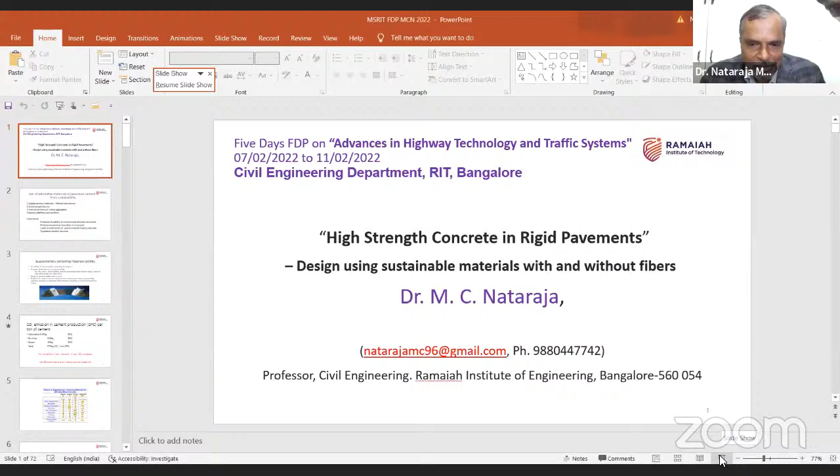Thank you, Professor Niranjan, for your nice words. Respected participants, mainly the teachers from different engineering colleges across the country, I'm extremely happy to be a part of this particular program, the 5-day FDP program being organized by the Department of Civil Engineering at Ramaiah Institute of Technology, Bangalore. As you know, the FDP is on advances in highway technology and traffic systems.

I'm extremely grateful to the first speaker. I was a bit worried whether I'd be able to give the complete glimpse of what I wanted to share as part of high strength concrete, especially applied to rigid pavements. But my job has become really simple because the previous speaker, the professor from IIT, covered many aspects of sustainable construction and sustainable materials, especially in concrete making as applied to pavements. I'm indeed grateful to the professor for making my job a bit easy.

Teachers, today I'll be introducing to you, for about 1 hour, the importance of high strength concrete, especially in the area of rigid pavements. How one can design high strength concrete using sustainable materials, with and without fibers, is what I'll be interested in covering.

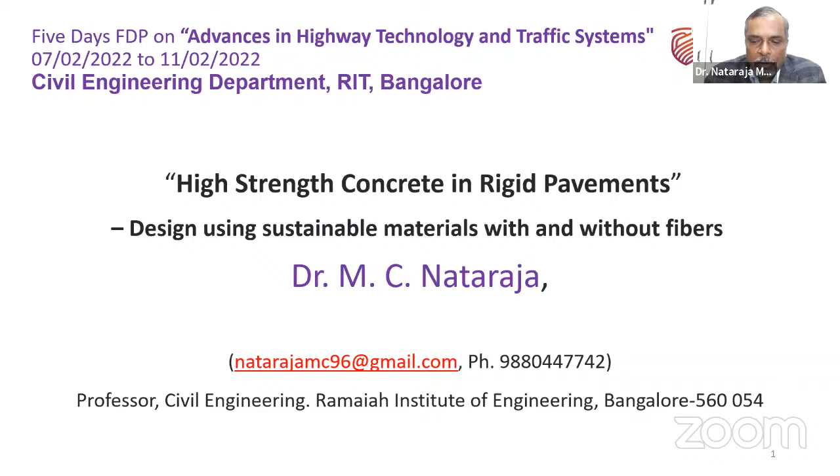And maybe at the end, for about 10 minutes, I'll be introducing the importance of fiber, especially in high strength concrete, mainly from the point of ductility and energy absorption capability of the concrete. I will now first show my slide.

Just to have a small introduction, use of alternative materials in pavement concrete, mainly from the sustainability point of view. Some of these materials were covered by the earlier speaker also in the first session. You're all aware of supplementary cementing materials.

Basically, they are called mineral admixtures. We have fly ash, slag, silica fume, metakaolin, calcined clay. And of course, we have a host of such mineral admixtures being covered in IRC code, and also in IS 456, being the basic code for concrete.

We also have a host of chemical admixtures, especially plasticizers, superplasticizers and hyperplasticizers, which are very popular, mainly from the point of enhancing the workability of the concrete, and from the point of saving cement or cementitious material. This chemical admixture is one of the compulsory things we see in today's RMC concrete.

Also, my dear friends, we have a lot of alternative aggregates, fine and coarse, that are being used in current concrete. You know that IS 383, published in 2016, speaks of many alternatives as part of fine and coarse aggregates, and use of these materials is really encouraging.

And of course, we also have special additives such as fibers. Different types of fibers are there, but I'll be rather interested in telling what happens to the concrete, especially high strength concrete, when steel fibers are introduced.

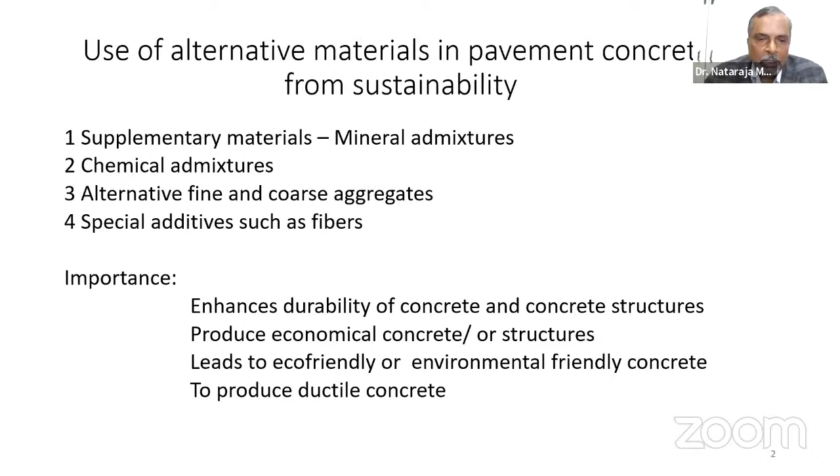So the importance of these supplementary materials, to put it in 2-3 sentences: these materials enhance the durability of the concrete, and when that concrete is used in structure, the performance of the concrete structure also gets enhanced. It produces economical concrete and hence economical concrete structures as well. It leads to eco-friendly concrete, and to produce ductile concrete, obviously with the help of steel fibers.

Now, these are all the host of supplementary cementing materials - I have taken this figure from Google - and we will be seeing different types of materials as an alternative to cement, and as a substitution to part of the cement. These days, people are using these materials.

In fact, I already made a mention of fly ash, slag, ground granulated blast furnace slag, calcined clay, metakaolin, and of course silica fume. Metakaolin and silica fume are the new generation supplementary materials.

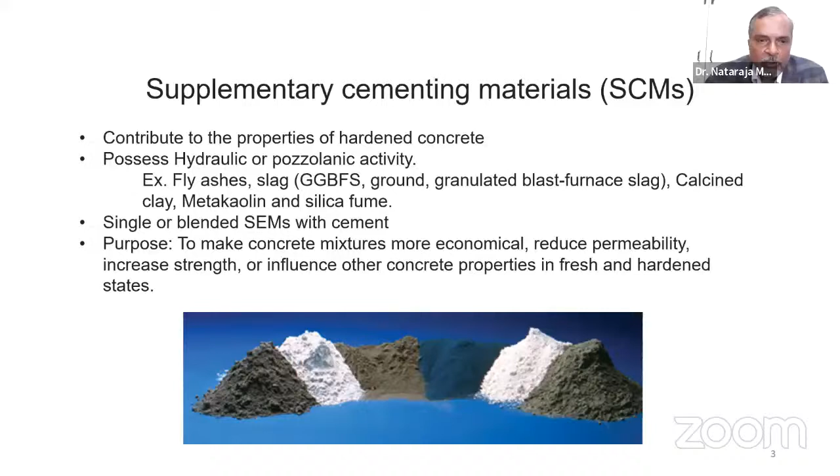We need to use it to the extent of about 10 to 15% in the production of high strength concrete. Otherwise, getting strength beyond, say, M60, M70, going up to M100 plus is extremely difficult with the use of other supplementary materials. So silica fume or metakaolin is a must supplementary cementing material as applied to high strength concretes.

Now let's see the importance of ordinary Portland cement in concrete production, which you are probably all aware of. Use of OPC today is not really recommended.

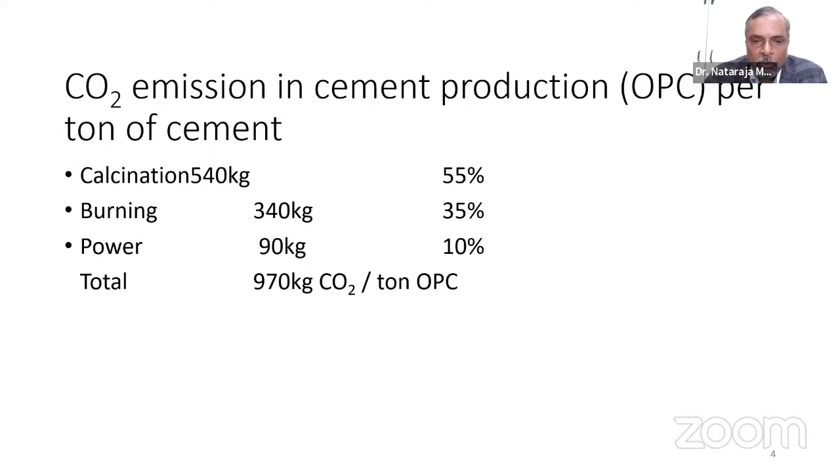As you know, production of 1 ton of cement leads to almost 1 ton of carbon dioxide emissions. We have different processes in manufacturing cement. The calcination process releases about 540 kg of carbon dioxide, constituting about 55%. Burning also produces carbon dioxide to the extent of about 35%, around 340 kg. We also need power for the energy part of cement production, about 10%, or 90 kg. All put together, this is close to 970 kg, which can be rounded off to approximately 1000 kg. So producing 1 ton of cement releases almost 1 ton of carbon dioxide to the atmosphere, which is something very large.

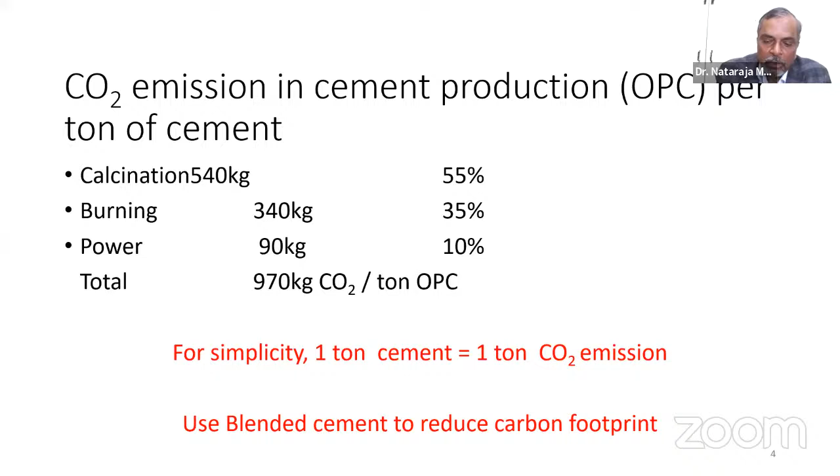This definitely has too much of a carbon footprint that needs to be reduced. The only way to reduce this is through use of different types of supplementary cementing materials and their combinations - binary blends, ternary blends, and you can also have blends of 3, 4, or 5 such supplementary materials, which is quite possible.

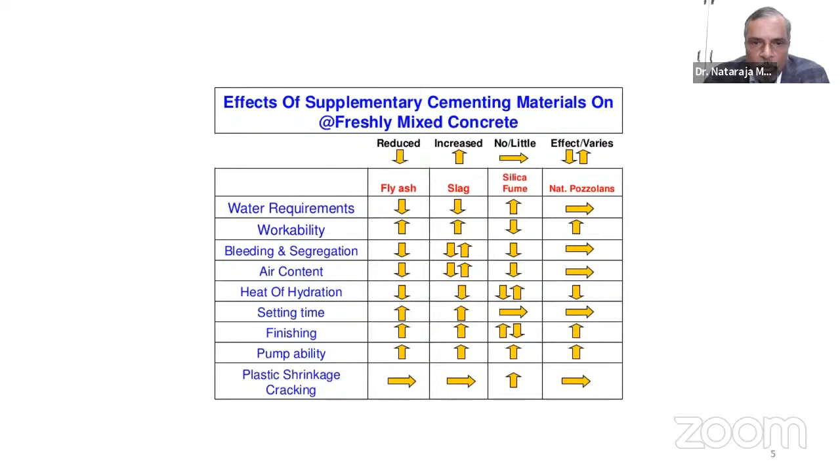In this slide, I have taken information showing that whatever property of the concrete you are talking of, especially from the point of fresh concrete - water requirement, workability, bleeding, segregation, heat of hydration - many of these properties are becoming better. So many requirements of concrete today are getting improved mainly because of the use of these supplementary materials.

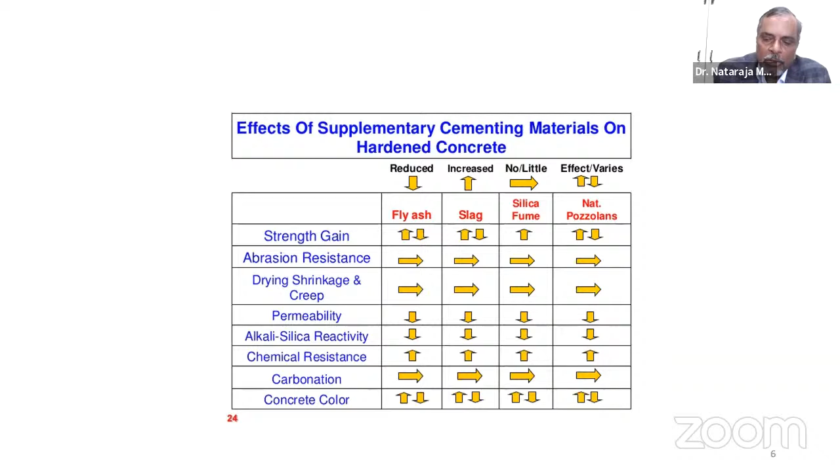The chemical resistance definitely improves. As far as carbonation is concerned, some people say it might improve when you have a combination of supplementary materials, but otherwise it's not much of a problem - it doesn't have much significance, that's why the arrow is almost horizontal. These are some of the advantages due to use of supplementary materials in production of any type of concrete from the point of hardened properties.

The next important thing is the use of chemical admixtures. According to the American Society for Testing and Materials code of practice, different types of chemical admixtures are permitted: type A being water reducing admixture, type B retarding admixture, type C accelerating admixture, type D water reducing and retarding admixture, type E water reducing and accelerating admixture.

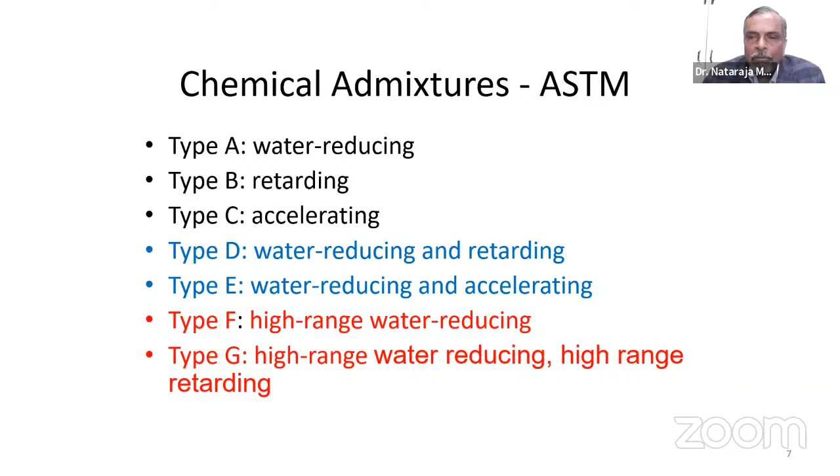In the current work we have done, in one way or another, we are using type F and type G, where type F is high range water reducing admixture - these are referred to as super plasticizers or hyperplasticizers in our country. We also have high range water reducing admixtures, very close to hyperplasticizer, maybe with accelerating or retarding effect depending on the situation. Whatever codes of practice we have in our country, similar codes of practice exist even in the West.

If you want to look at some Indian codes of practice, it is IS 9103. I have given the code of practice for ASTM which I already spoke of. We also have the British code of practice BS 5075 and IS 9103.

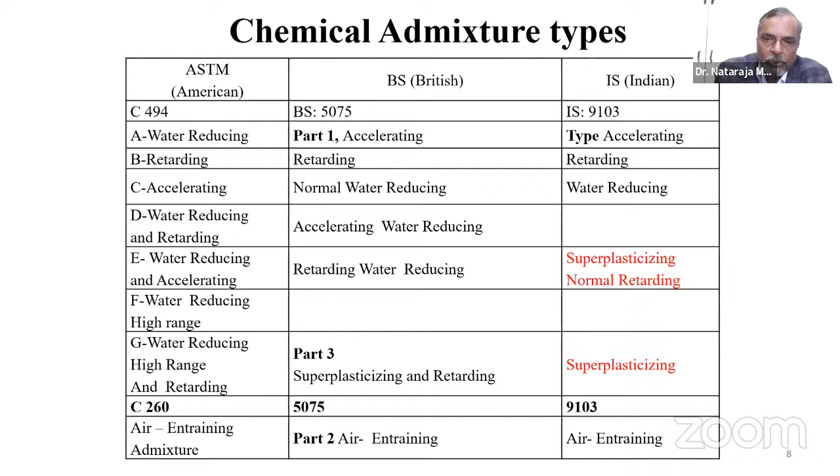Whatever the list of chemical admixtures covered by ASTM, a similar type of coverage is there in BS and also in IS. What is important for Indian research is that we have different types of plasticizers available. It could be a conventional plasticizer, a super plasticizing admixture of normal retarding type, a conventional super plasticizer, or a hyperplasticizer. Use of these super plasticizers and hyperplasticizers is very popular in RMC, especially in the production of high strength and high performance concrete.

So now I'll be interested in introducing the toughness of concrete. This is one of the properties we're talking of today, especially for pavement applications. If you see conventional concrete where fibers are not used, whether normal strength or high strength, though it is very good from the point of compressive strength, it has its own limitations. Especially the ductility part of the concrete is rather questionable.

The energy absorption capacity of the concrete is rather less under all types of loading, whether compression load, tension load, especially in split tension test or flexural test, or as applied to wear and tear resistance. The normal concrete is not going to perform well because it is highly brittle in nature. Many people are under the impression that as the strength of concrete increases, many toughness related properties will increase. There might be a small improvement in toughness, but the rate of increase in toughness and energy absorption capacity is not in the same ratio as the compressive strength increase.

So when you take M40 concrete compared with M20 concrete, the toughness may be slightly better, but not that the toughness of M40 concrete is increasing almost by 100%. Unless we add some additional materials to the concrete, it is extremely difficult to increase the energy absorption capacity of the concrete. So this is where the use of fibers plays a very important role.

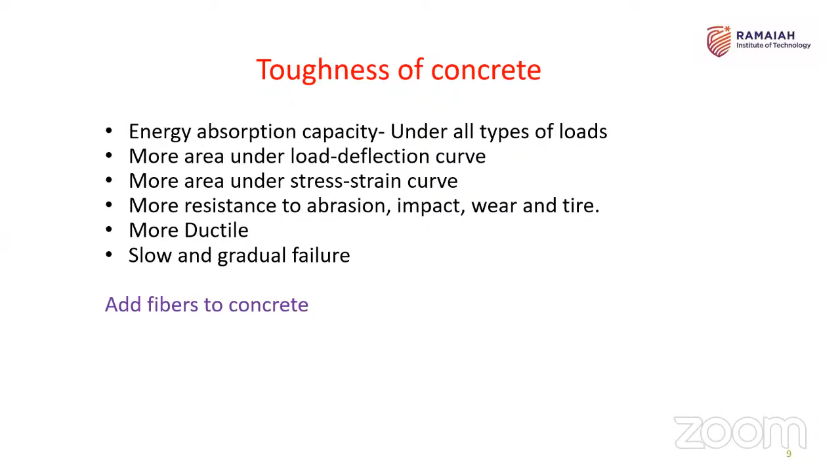More area under the stress strain curve - the moment I say stress strain curve, obviously it is the stress strain characteristics of the concrete in axial compression. So that is where the improvement in toughness, improvement in energy absorption capability of the concrete, and more resistance to abrasion, impact, wear and tear is mainly because of the addition of different types of fiber. But if you add steel fiber, there is a lot of improvement in these properties, mainly from the point of strength and energy absorption capability. And that is where structurally your concrete becomes better and better with the addition of steel fiber.

So what I want to tell you is that with this addition of fiber, your concrete will become more ductile. Obviously the failure of the concrete will be rather slow and gradual - it is not an instantaneous type of failure, not a catastrophic type of failure. So you should be very happy to have these steel fibers introduced into the concrete. Add fibers to concrete so that many of the performance characteristics of your pavement increase.

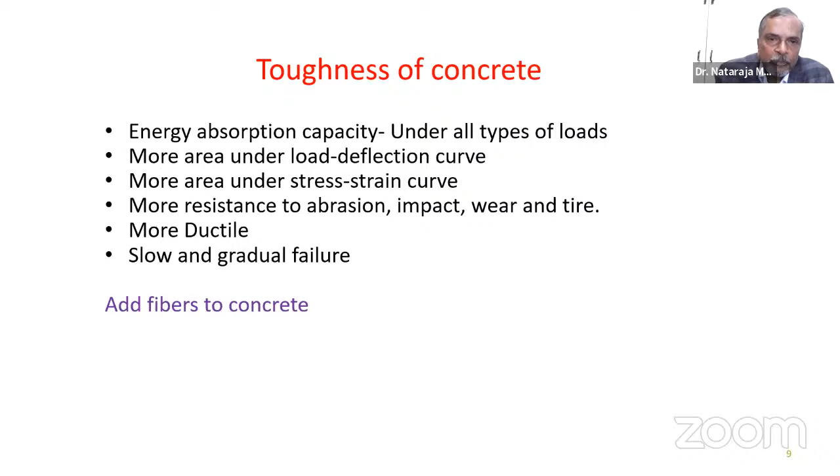That is where the compressive strength of concrete is really important from the point of characterization of concrete with respect to its grade. But without knowing the real distribution, the real area under the curve, the load deflection diagram, or even the stress strain diagram of the concrete, it is really not possible to define any performance characteristics.

Now to this plain concrete, if you add fibers at some rate, I will come to that in a short while, the area of the descending part also gets modified, which we will be discussing later, and the load carrying capacity also will increase marginally.

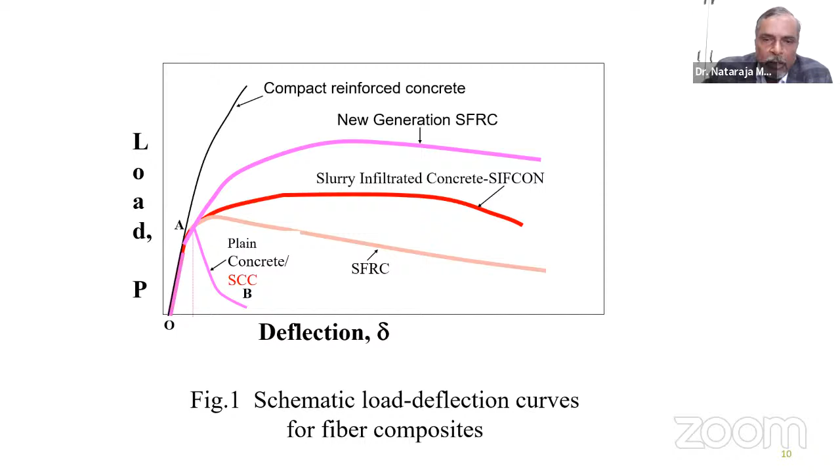Now just a few words connected with fiber, because today fibers are also being used. IS 10262, published just a year back, is a bit silent about the use of fiber. But if you see the IRC code meant for concrete mix design, steel fibers are permitted. In fact we have already published several papers available in the Indian Concrete Institute journal - just a couple of months back one paper has come there. And there are several papers in this direction on the international platform, so you can refer and get to know the advantages of some of these fibers.

Aspect ratio of the fiber comes into picture, that is L by D - what is the length of the fiber, equivalent length divided by equivalent diameter. As the aspect ratio increases, the mechanical properties of the concrete might increase, but other related properties, especially from the rheological point of view - the workability and other things - might decrease to some extent. And how much fiber you're adding is another question you need to ask.

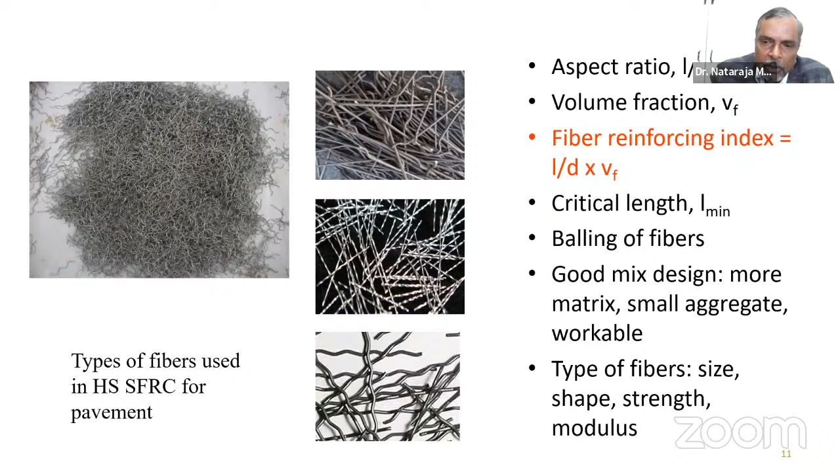So this is just a small introduction, because today these types of fibers are also being used in pavement concrete. And one more important point from the advanced concrete technology point of view, because today many of you must have studied this.

Concrete technology is a basic subject, and advanced concrete technology of new generation materials is what many people are talking of now.

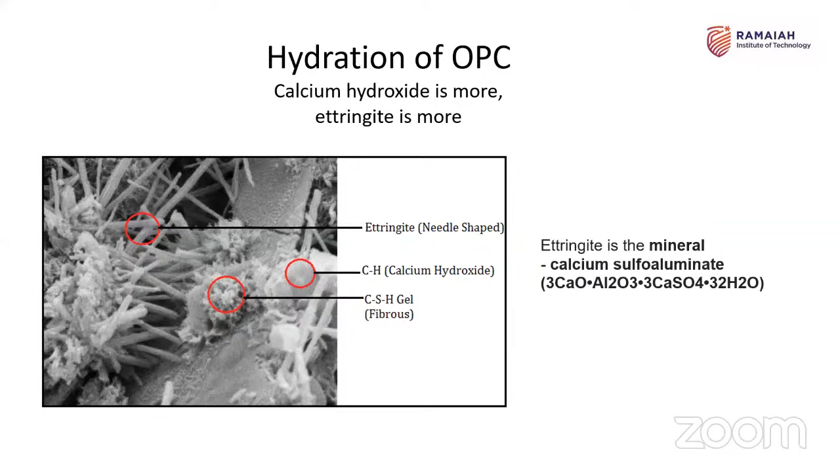When the OPC hydrates, we also should know that calcium hydroxide is liberated. This calcium hydroxide is not a good material. It reacts with carbon dioxide, and further reacting with carbon dioxide.

You get calcium carbonate and calcium bicarbonate, which leach out of the concrete. Because of this, the concrete becomes more porous inside. So that is where the durability of the concrete over time becomes questionable.

So we need to decrease this calcium hydroxide, but as long as you have OPC alone to the extent of 100% in your concrete, it is extremely difficult to avoid this calcium hydroxide. So this is really not a material required from the point of durability.

Also, we have one more important compound, the calcium aluminate. Though we keep the calcium aluminate less than about 10%, this calcium aluminate, along with some sulfate compounds, matters because many a times the concrete will be exposed to the marine environment.

And in fact, we have acid attack coming into picture, and sulfate attack coming into picture, with different types of sulfates reacting with gypsum.

And with calcium aluminate, over time, we get a material called ettringite. This is a sort of mineral, and it is one material responsible for the lack of performance, the lack of durability related performance, especially in your concrete.

This is referred to as calcium sulfoaluminate, which is really a detrimental material as far as ordinary Portland cement is concerned: ettringite. And of course, ettringite can form immediately, or it can even form over time, depending on the situation.

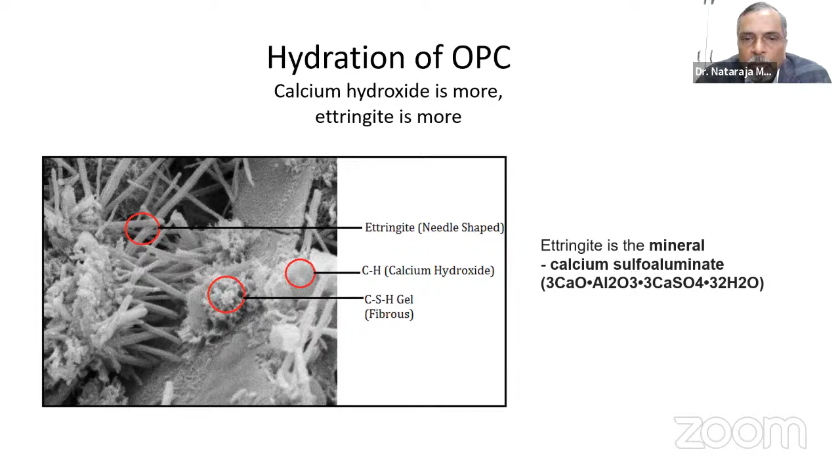We also have high volume fly ash concrete, very popular in the West, but as far as our country is concerned, maybe to the extent of about 25 to 30% is being used in blended cement. And of course we have some RMC applications where slightly in excess of 30%, maybe going up to 40, 45%, but still definitely not more than about 50% of fly ash in any of the concrete applications.

One more important thing I would like to tell you, especially from the point of view of high strength concrete mix design: I have seen people simply modifying the composition of the concrete, the combinations of the supplementary material, without understanding how these supplementary materials are really contributing to the enhanced strength of the concrete. You will be able to make this out only when you see the scan picture of the concrete.

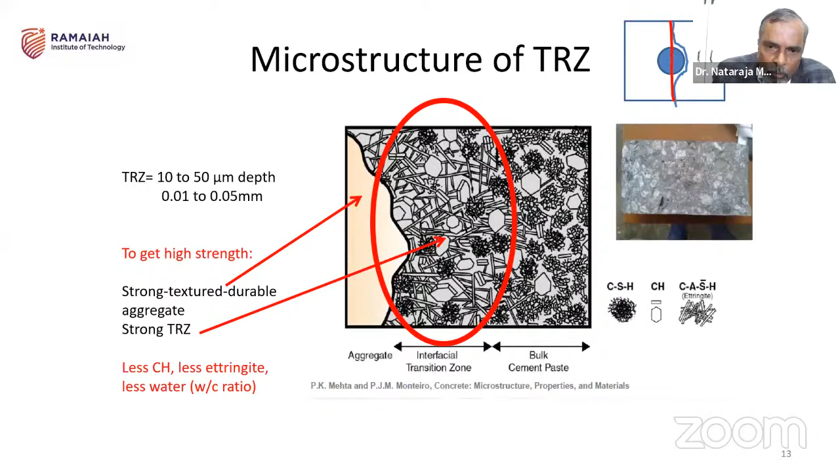So you can call these two materials as having a Young's modulus, exhibiting linear elastic properties. But concrete is elastic, my dear friends, it is not linearly elastic. There's no Young's modulus you can define for concrete.

We have different definitions of modulus as far as concrete is concerned. When you add the aggregate and the cement paste, we get concrete, and the performance of the concrete lies in between that of the aggregate and the cement paste. This is very clear.

You will never be able to bring the quality below that of the paste unless the mix design is very poor. At the same time, whatever way you do the concrete mix design, you will never be able to bring the behavior of the concrete much closer to the aggregate, because of the very poor quality of the cement paste.

How to increase the quality of the cement paste is the question now. That is where a low water cement ratio of 0.2, 0.25, 0.3 with supplementary cementing materials comes in. Probably this line itself I can push towards the y-axis.

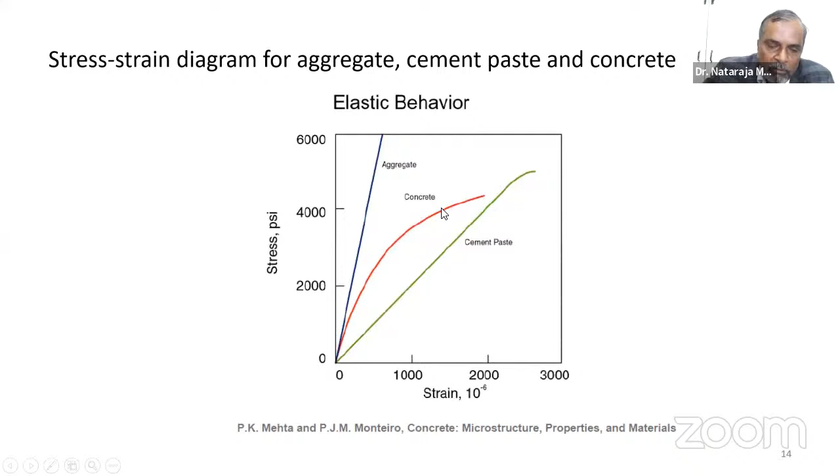At the same time, if you go for a good quality coarse aggregate, today a lot of unconventional materials are coming up, like steel slag, which is far better compared to conventional aggregate. I'm very sure this behavior can be pushed further towards the y-axis, and the cement paste behavior can also be pushed further, so the concrete behavior becomes far better, as you'll see in the next slide.

With this, any property of the concrete - the modulus of elasticity, the secant modulus, the chord modulus, whatever you're talking of - will definitely be better compared to conventional concrete. So keeping this concept in mind, if you do the concrete mix design, getting M60, M70, and even M100 plus concrete with materials available in the Indian context is really possible.

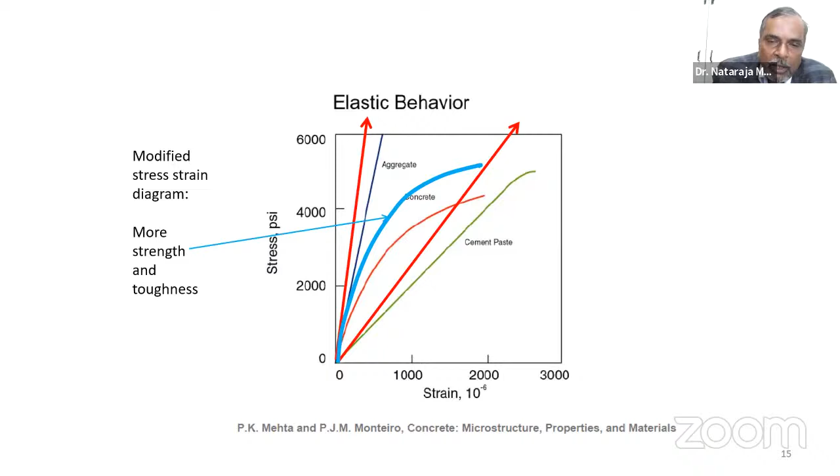That's what I wanted to share as part of high strength and very high strength concretes in our country. Also, one small thing I'd like to tell you - this is where some debate of water cement ratio comes into picture. I'm not going to take much time here.

The water cement ratio in excess of 0.55 is really not permitted by the Indian code, IS 456-2000, being the mother code of India. Why is it so, and why can't we go for a concrete of 0.6 or 0.7? But in Western countries, higher water cement ratio is permitted.

What is important is that the concrete is impervious to water, impervious to chloride ion, impervious to all sorts of ingression. But as far as water is concerned, when it evaporates, certain internal defects in the form of capillaries or voids will be introduced into the concrete, and that is the problem.

But when you start using supplementary cementing materials along with the cement, even with 0.55, 0.6 and 0.7 water cement ratio, my dear friends, if you see these strength ranges of 2000 to 3000 PSI - this graph is taken from the American Concrete Institute 211 code, available on the internet - kindly see that 3000 to 5000 PSI is nothing but concrete having a strength of 20 to 35 Newton per mm square.

But why, in the Indian context, are our people struggling to get even M20, M25? They are simply putting water, and with that water, they are not able to get the compressive strength because they are not putting supplementary cementing materials. They want to produce the concrete only with OPC, and that is the reason.

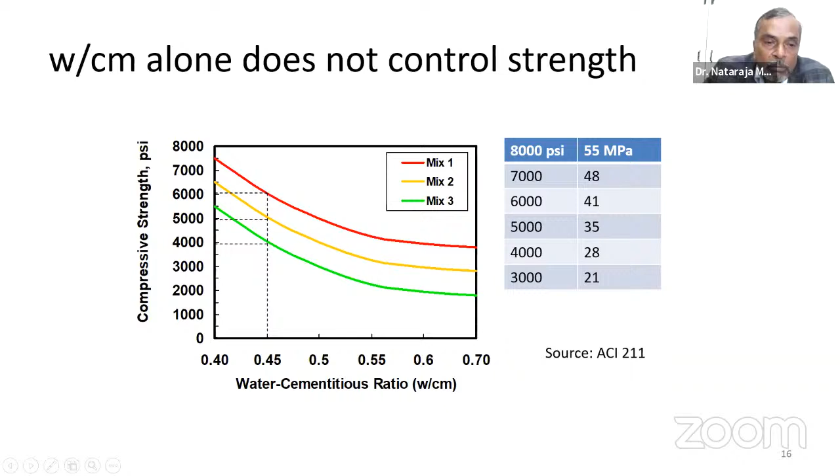If you see in the next slide, the moment you start using supplementary cementing materials, some combination of SCM1 where I have tried with fly ash, and maybe the second one with slag, some combination of fly ash and slag as a ternary blend, kindly see the amount of charge that is passed when conducting a rapid chloride permeability test.

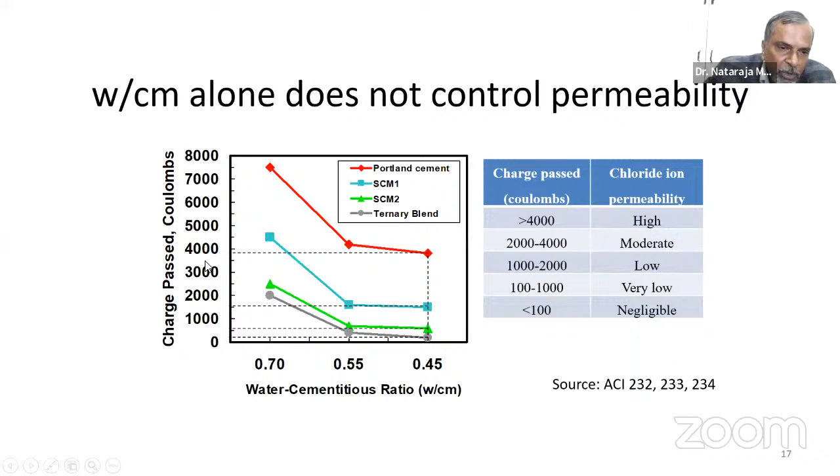This particular service is available everywhere, and every laboratory is having this facility. Even at a water cement ratio of 0.7, not permitted by the Indian code, you are able to get a concrete whose charge passed, the Coulomb value which defines the impermeability of the concrete, is close to 2000. If you see the rating given by the ASTM, it is a very, very low rate of charge being passed. But otherwise, if you go only for ordinary Portland cement, even at a water cement ratio of 0.7, your charge will be very close to 7,000 to 8,000, meaning it is a highly permeable concrete.

So if you want to make your concrete less permeable, you have a mix design, everything is being defined, but replace some 25% of the cement, 50% of the cement, with quality supplementary materials, bring down to binary blend, ternary blend, and with that your rapid chloride permeability decreases tremendously, giving a very low permeability concrete.

In many studies conducted in the recent past, our RCPT value is very close to 100 to 200, indicating that our concrete is almost close to some sort of polymeric concrete, epoxy concrete, highly impermeable concrete, and that can be regarded as a metal concrete. Today people are talking of metal concrete, where my concrete can be compared similar to that of a metal from the point of permeability.

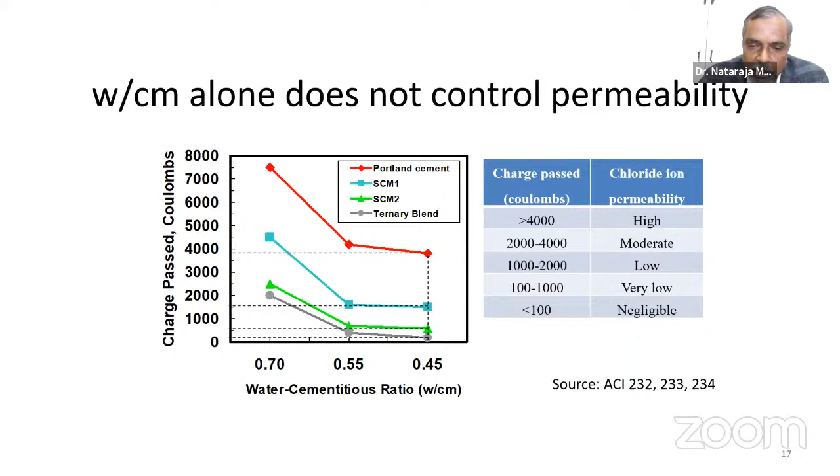Now these are all some of the important things you should know before you venture into designing high strength concrete or even high performance concrete, especially M60 going up to M100. At present the Indian recipe is available, and anything beyond M100 is also quite possible.

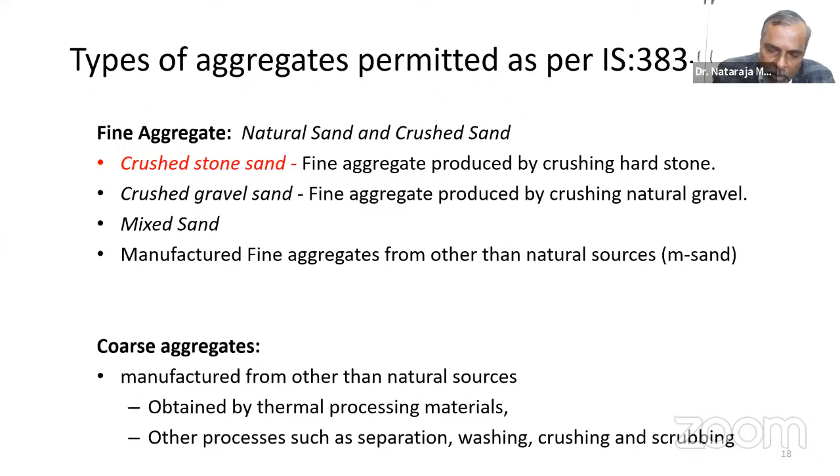And of course you also have a very interesting code released by the Bureau of Indian Standard, IS 383. 1970 was the earlier code, where only natural river sand was permitted. But today we have a host of such aggregates that can be used as fine aggregate and also as coarse aggregate. I'll be just showing you one slide, which is really not encouraging.

If you ask me as a concrete technologist, I really don't agree with what Bureau of Indian Standard has suggested at present. Indian Standard is suggesting just 20 to 50% replacement of regular aggregate with unconventional aggregate, that too in plain concrete. So that is where these values are not so encouraging. But if you see, in case of RCC, not even to the extent of 25% the Bureau of Indian Standard is recommending. So now it is high time for BIS also to come out with some new documents based on the research information available in the Indian context, and also taking some international references.

100% of these types of unconventional materials should be recommended. If you see many of the technical papers which we have published over a time of 10-15 years in the past, they are all with 100% replacement of the aggregates. Of course we also used some 20, 40, 60% just to tell you where exactly certain parameters will become optimum. But otherwise, even if you use 100% of the aggregate, you may be having a problem of workability.

Increase the workability with the admixture. You may be having a problem of compressive strength. Decrease the water cement ratio, decrease the water, and ensure that a slightly higher percentage of the chemical admixture is exercised. With that your workability is satisfied. Your lower water cement ratio, definitely according to Abrams' law, your compressive strength increases only with mineral and chemical admixture.

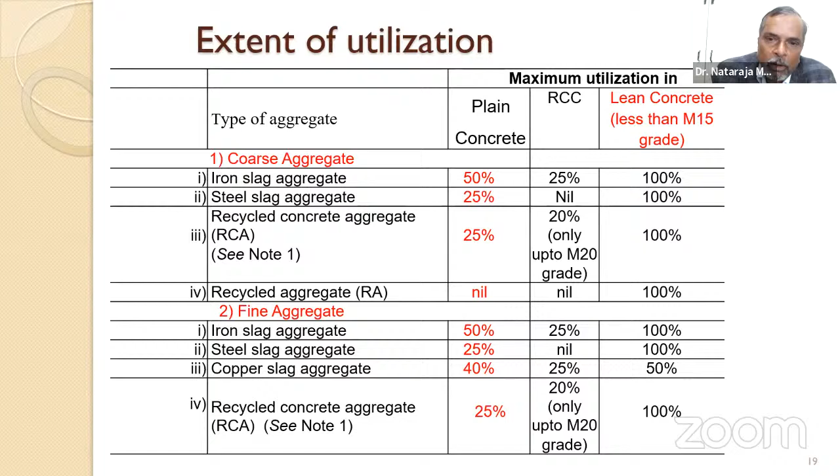Now, finally coming to the mix design, the studies on high-strength concrete, IS 10262 2019. My dear friends, I'm not going into the greater details of concrete mix design, because you are teaching this particular course to your undergraduate students also. So I will just tell you in a nutshell how one can design the concrete, taking all the information discussed so far, so that some good information can be looked at from the mix design point of view. We have taken up a very simple work.

I'm just taking one combination of supplementary materials. I have used GGBFS to the extent of 50%. Silica fume - without silica fume, it is not possible to produce high strength concrete. Otherwise, you may have to use metakaolin to the extent of about 10 to 15%. So 65% of supplementary materials and only 35% cement we have considered here to produce concrete up to M100.

And also we have the PCE based admixture, polycarboxylic ether based admixtures. It is a new generation admixture, works on the principle of steric hindrance, not on the principle of electrostatic repulsion. Electrostatic repulsion is a concept generally observed in plasticizers.

Today we have high molecular weight based polycarboxylic ethers and esters with the steric hindrance concept, wherein about 0.25% of admixture - maybe to make things clear, just half a liter of chemical admixture - where you will be able to remove about 30 to 50 liter of water. Instead of making concrete with 190 to 200 liter of water, you need only 130 to 150 liter of water, my dear friends.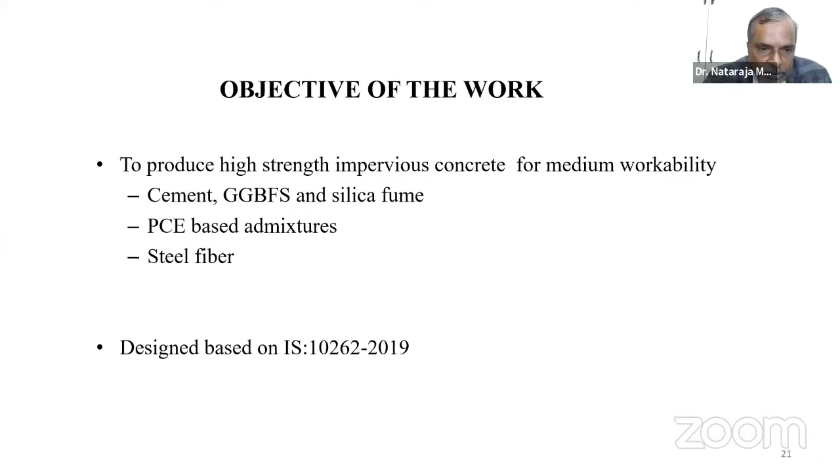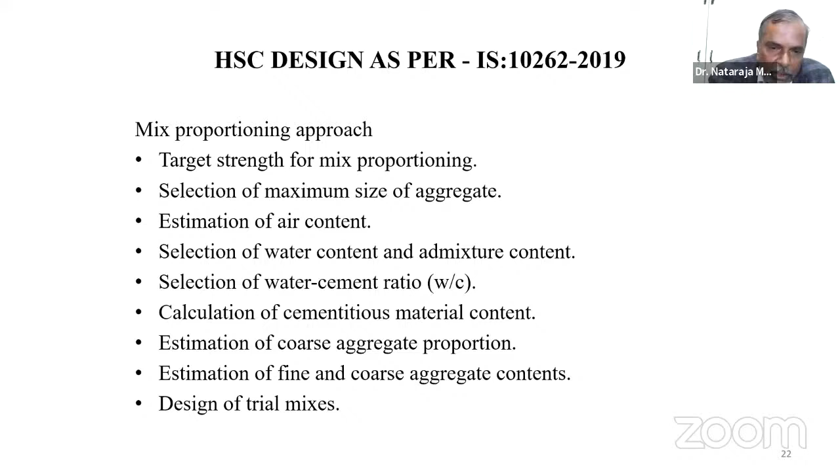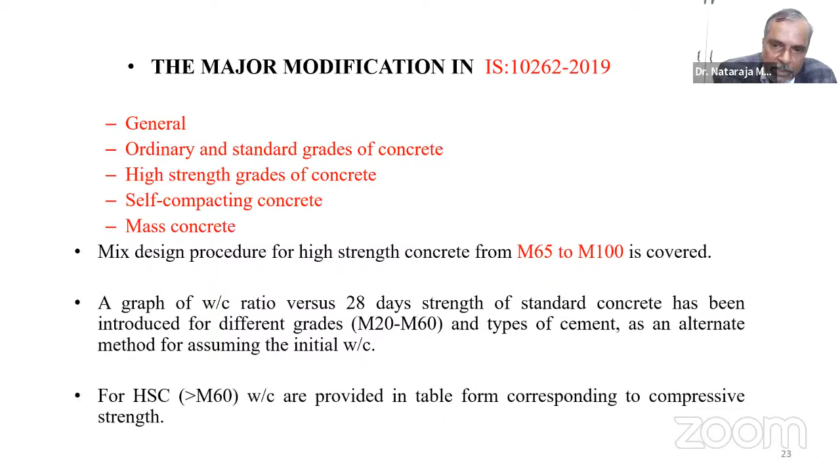And of course we also tried with steel fiber as another work, where some ductility part of the concrete can also be appreciated. So there are 9 steps in the mix design, which is already known to the faculty. Since you're all faculty, I'm not going into the details as to what this mix design is all about. And of course, M65 to M100 is what the concrete mix design covers. High strength concrete means 65 and above only, as far as the current code is concerned.

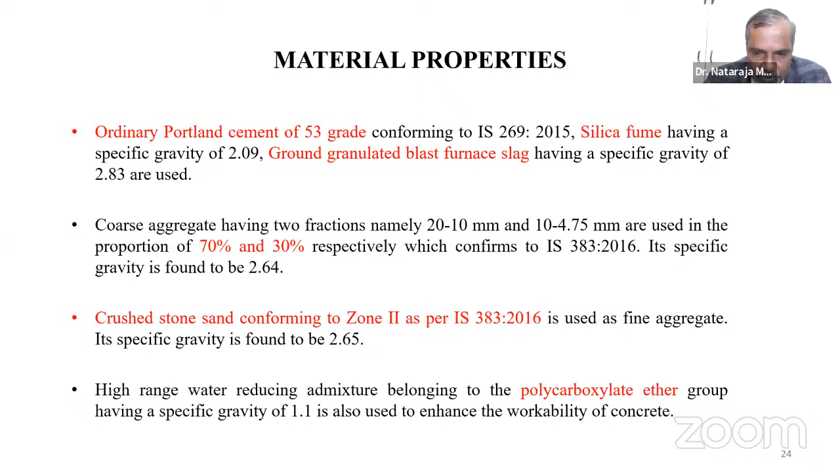And we have used IS 269/2015, again the latest code, where 53 grade cement is permitted, silica fume with a specific gravity of 2.09, and GGBFS with a specific gravity of 2.83, and 70% of the bigger aggregate, 20 to 10 size, and 30% of the lower size, 10 to 4.75. Sand is zone 2, recommended for strength concrete, and as I mentioned, polycarboxylate ether being the hyperplasticizer.

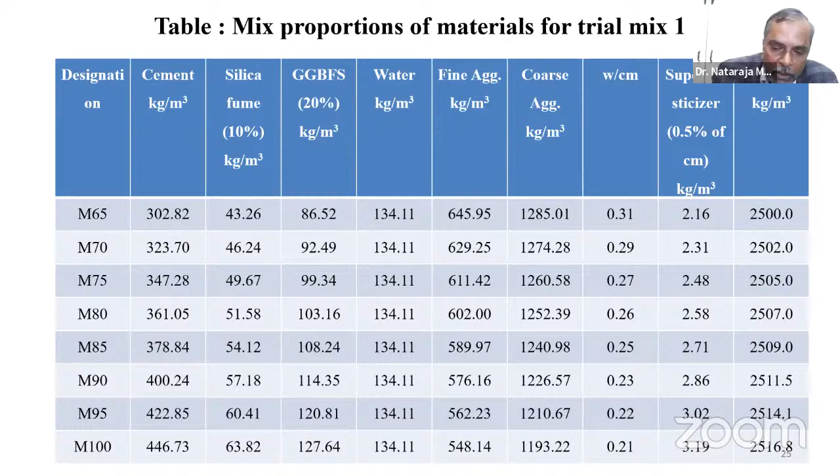The same thing I have put in a pictorial way, so you can just appreciate it. I'm leaving the PPT also for your reference, maybe you can just go through it whenever you have free time. And you can get back to me on phone, or send mails to me so that I'll be responding to your queries.

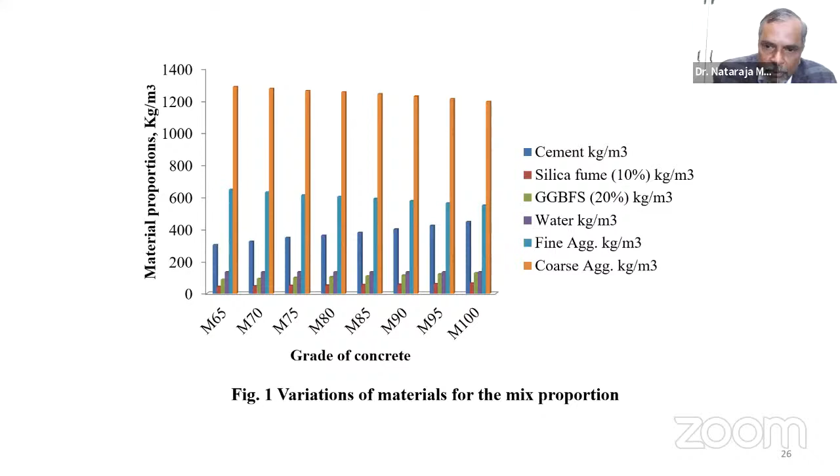And of course, we need to do the trial mixes. Without trial mixes, your mix design is not going to be completed. In fact, I have seen in many engineering colleges they do only one mix design and finally recommend it, but we need to go for a trial mix. What is trial mix? Keeping the water constant and changing the water cement ratio by plus or minus 10%, we need to work out two additional concrete mixes for any concrete mix design, so that economic constraints can be exercised in your concrete mix design.

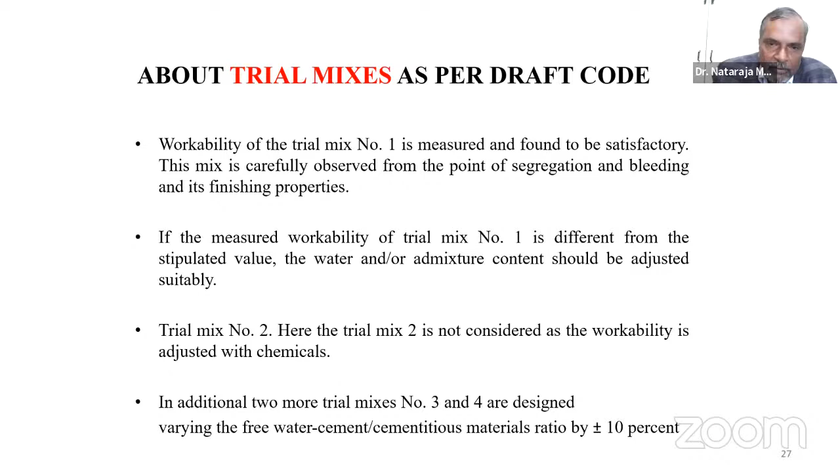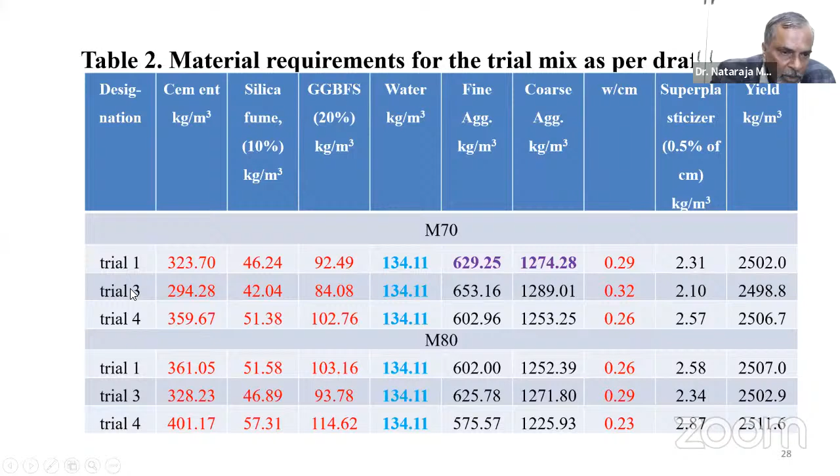Now kindly see here, I have put some information. If you are designing an M70 concrete, this is the first trial mix, what you get from the first trial. And anyway, you have the computer program where additional trial mixes can be exercised. Based on the result of the first trial, we will be doing the mix design of trial 3 and 4. This has to happen inside the concrete laboratory.

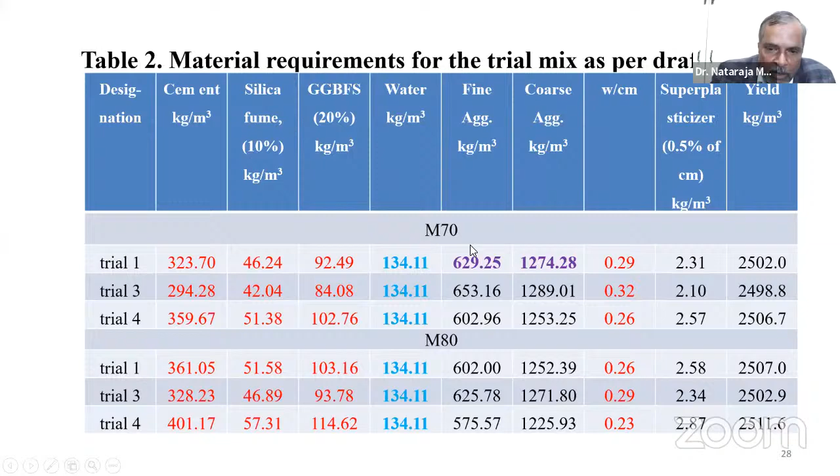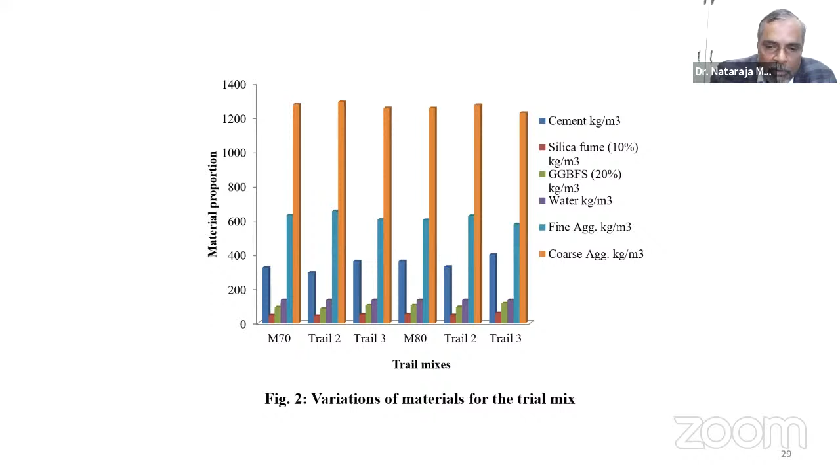And of course, kindly see the water cement ratio. In the first case it is 0.29 plus or minus 10%. And for M80, the first water cement ratio is 0.26, what I get from the basic mix design, and with plus or minus 10% I will be having two water cement ratios. Kindly see the increase and decrease in the cementitious system. And all these things we need to again observe in the form of a graph, and also develop what is called the water cement ratio graphs to appreciate what variations are likely to come.

And kindly see, we have designed for 70. 75 mm was the target slump, but we are really not bothered what the slump of concrete is. Even if it is 50, we are not going to bother, because we slightly increase the admixture dosage and get the 75. By chance, if it is 100 mm as against 75, we need to decrease the dosage of the admixture so that any target value of workability can be achieved. This is not a design parameter as far as our work is concerned. So any change, I can adjust by changing the dosage of the admixture.

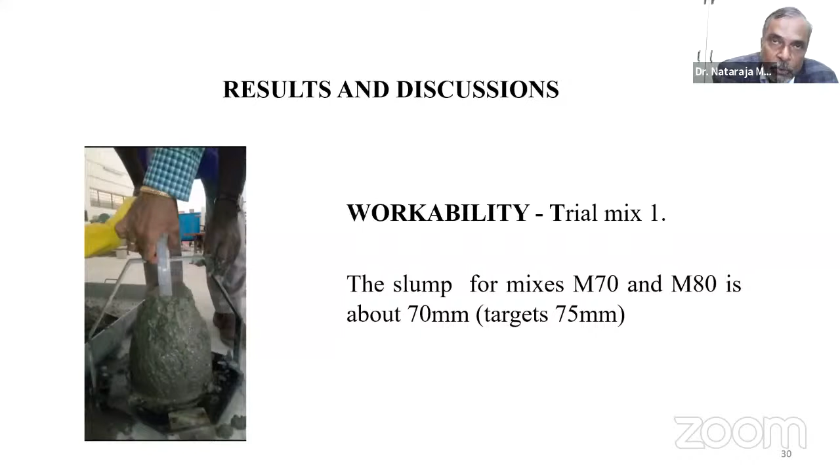And kindly see the compressive strength, it is quite appreciable at 3 days, 7 days, and 28 days. I have put it here: 59, 68, 79, and 90, as far as M70 concrete is concerned. At 28 days I'm getting 79. What I'm expecting to get is just 70 plus t times S, standard deviation times the statistical value, that extra component to take the difference from lab to field. That is where about 6 MPa extra I'm expecting, so 76 probably I would have been happy, but it is slightly more, I'm getting about 79, rather close to what I wanted. So I'm not doing any further change.

As far as M80 concrete is concerned, I need about 86, so I'm getting about 88. And kindly see, at 90 days there is a marginal increase in strength. One more important thing, especially for the teachers, I'm sure you are aware of this fact: the strength you get at 7 days, in comparison with the grade, is almost about 90% of the expected strength achieved at 7 days itself. So this is the beauty of high strength concrete.

Now, if you take conventional concrete, say 30 Newton per mm square, we get about 20 Newton per mm square at 7 days, that's 2/3 of the strength, meaning the remaining 33% comes from 7 days going up to 28 days. But in high strength concrete, you get almost 85 to 90% of the strength, almost equal to the grade. I want M70, I'm getting much more than the grade. I want M80, I'm getting much more than the grade at 28 days itself.

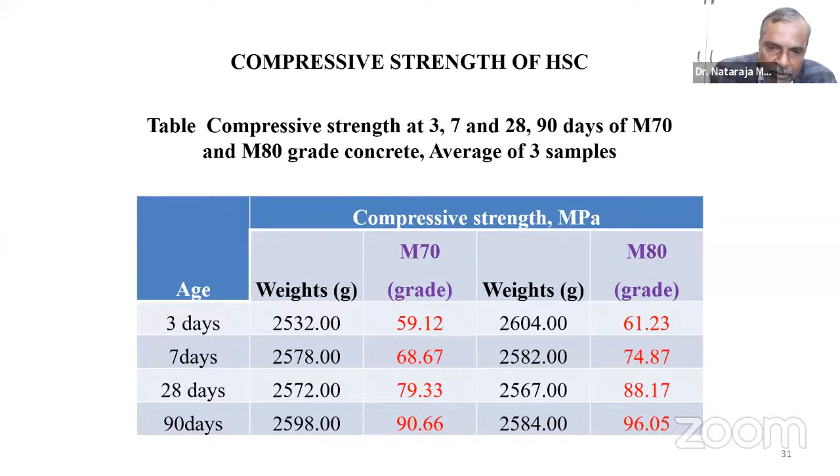And that is the beauty of high strength concrete. Here, hardly 10% of the strength comes from 7 days to 28 days. Now, what is important is to cure the concrete for the first 7 days. If you are not curing it for the first 3, 4, 5 days, and then later curing even for months together, you are not going to get good strength. This is one important point I would like to share with all of you, and I've put it in graphical manner.

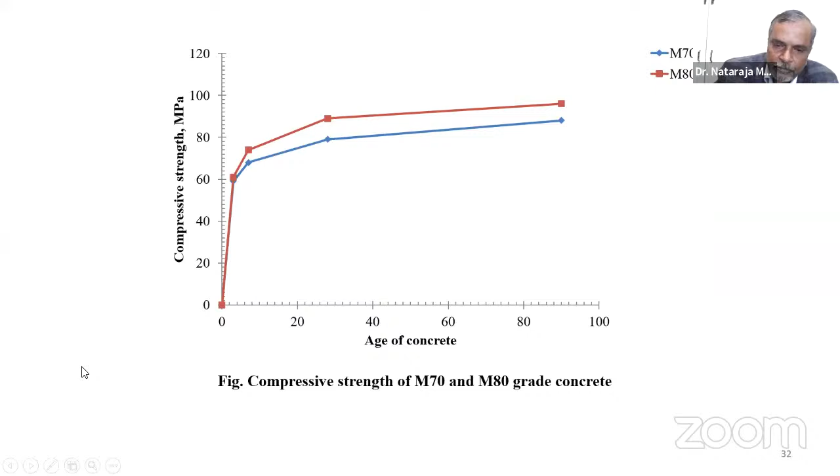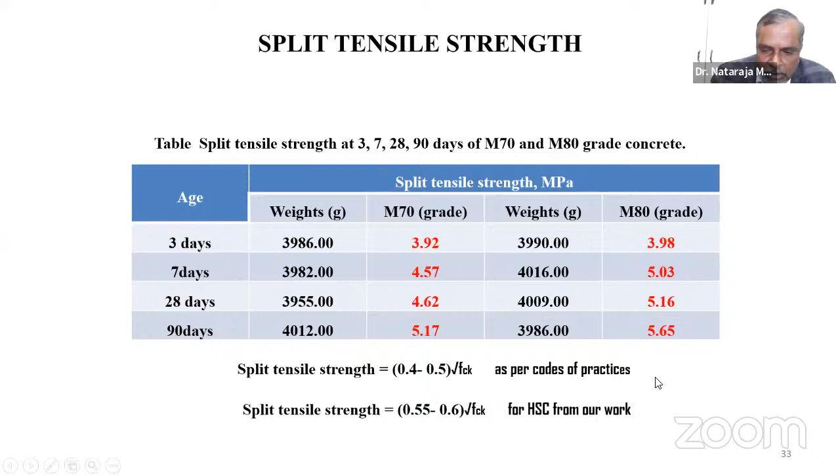And even the split tensile strength - kindly see, as the age in days increases, the strength also increases, and all the equations in the codes of practice are being followed. So seeing is believing. This is the variation of split tensile strength, and kindly see the nature of failure when you crush a concrete cube, prism or cylinder.

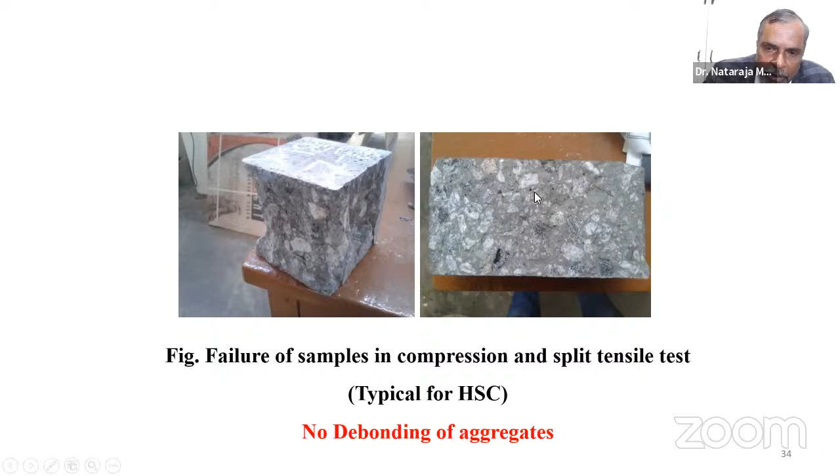Kindly see, there is no debonding of the aggregate happening, meaning all aggregates are cutting across, meaning the aggregate has really contributed to the strength. There is no debonding - this is where the importance of the transition zone comes into picture. The transition zone is so strong, it is able to hold the aggregate, embracing it completely. This is where the importance of high strength concrete comes into picture.

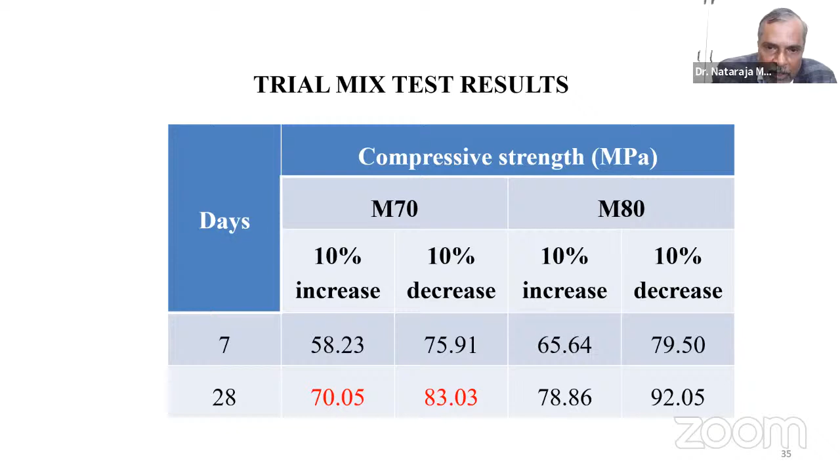And compressive strength for 10% increase or even 10% decrease, you can draw a graph and appreciate it. This is the final graph that is very important from the point of view of subsequent concrete mix design. Even now, using the same set of materials, if you want to design an M50 or M60 concrete, determine the target strength and pick up the water cement ratio, either for the 7-day requirement or even the 28-day requirement. Your further concrete mix design will become very easy with these graphs being developed.

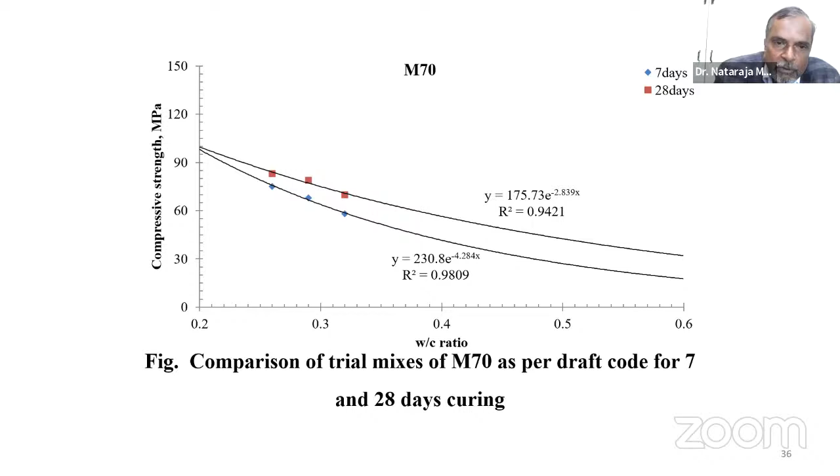All these things we have published in the Indian Concrete Journal and Indian Concrete Institute Journal very recently, and you can have a look at those technical papers for first-hand information. A similar exercise we have done for M80 concrete as well, so this will become the input for the concrete mix design for your subsequent mix designs.

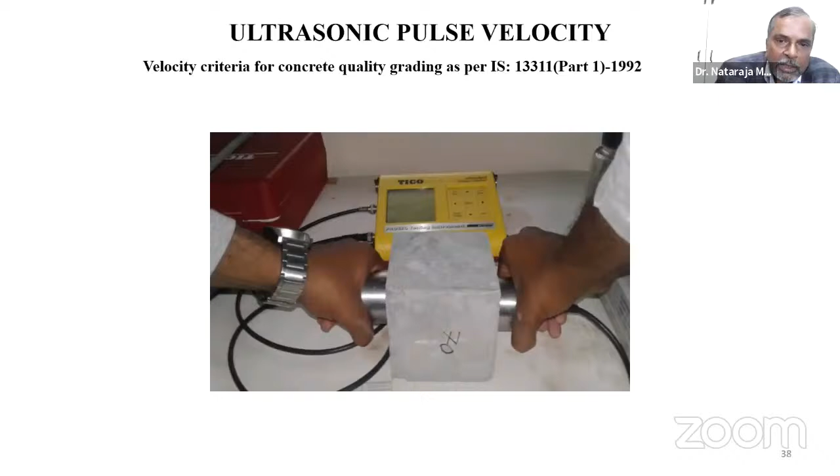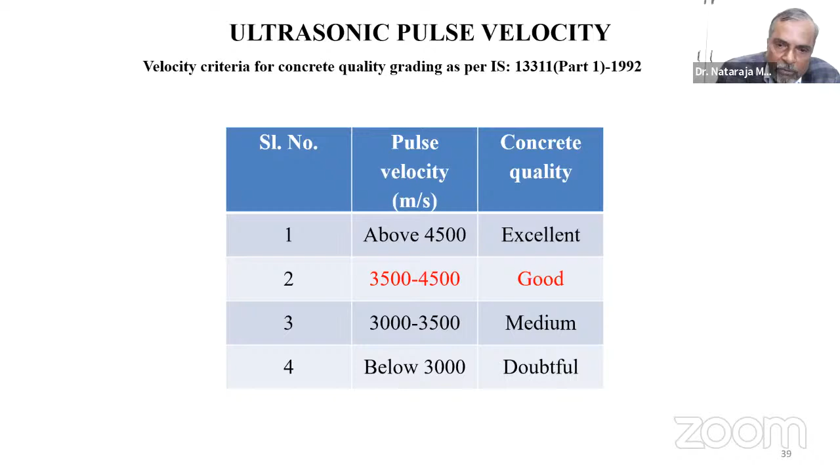Of course, we have also done some NDT tests from the point of quality assurance - this is the ultrasonic pulse velocity test. Kindly see the range as per Indian code 13311 - 3,500 to 4,500 is a very good concrete. And this is the rebound hammer value, and kindly see our ultrasonic pulse velocity value.

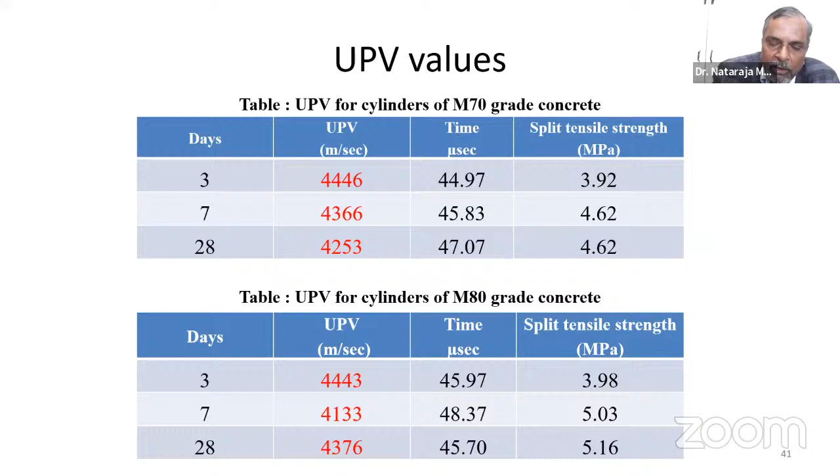3,500 to 4,500 is the expected range, but we are getting more than 4,000, indicating that all our high strength concrete, whether M70 or M80, satisfy the requirements of quality as per the codes of practice. Even the rebound values are quite encouraging. These are all remote numbers, but the actual compressive strength is what we have seen by testing.

But one thing I would like to tell you at this juncture: your rebound hammer is not applicable for high strength concrete. In fact, even that graph itself has a limitation - anything beyond M50 is not recommended, but the graph only gives you strength as 50 to 56 based on the observed rebound number, whereas your actual strength is much higher. This is not only with M70 but even with M80 concrete.

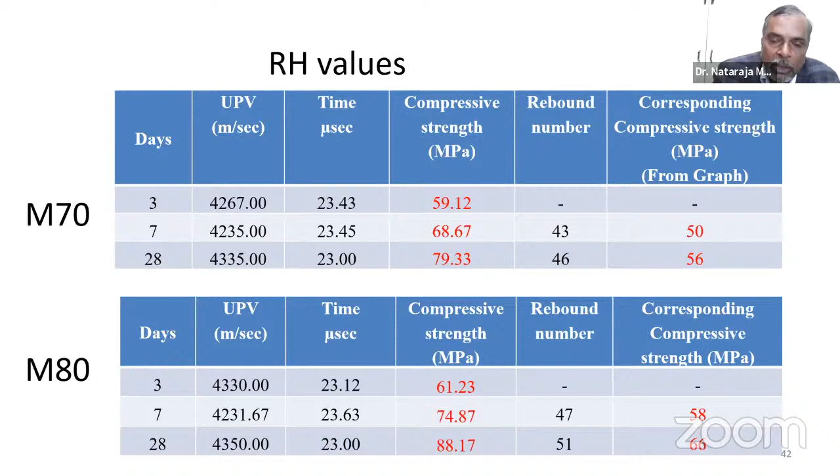The conclusion from this is that your rebound hammer is valid only for standard concrete, say M20 going up to M50 grade - anything in excess of M50, you have to be very careful in interpreting results. Your rebound hammer may say that the strength is less, but your concrete strength may not actually be lower. This is where the importance of certain things comes into picture. Now, rapid chloride permeability test - we got it done from Civil Aid.

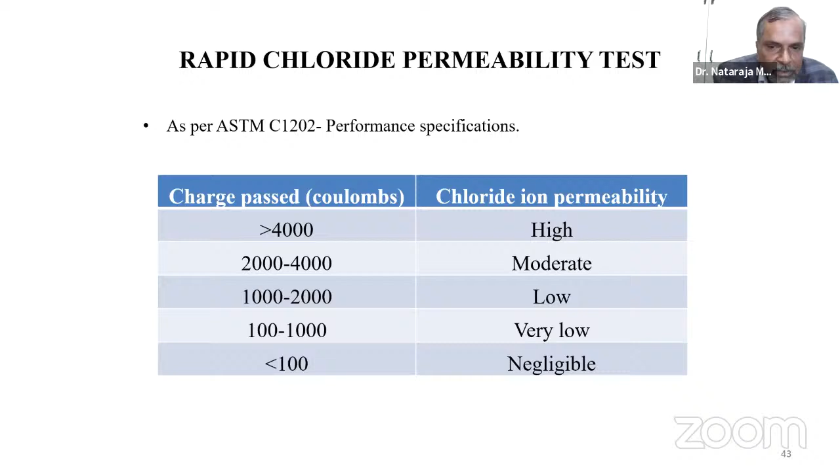And this is the range, as you can see here. Any concrete, if you test it, will be very close to 1000 to 2000, indicating that the permeability is low to moderate. But because we are using a higher percentage of supplementary materials, and also adding silica fume, our RCPT value is coming very close to 62 to 100, indicating that it is a highly impervious concrete.

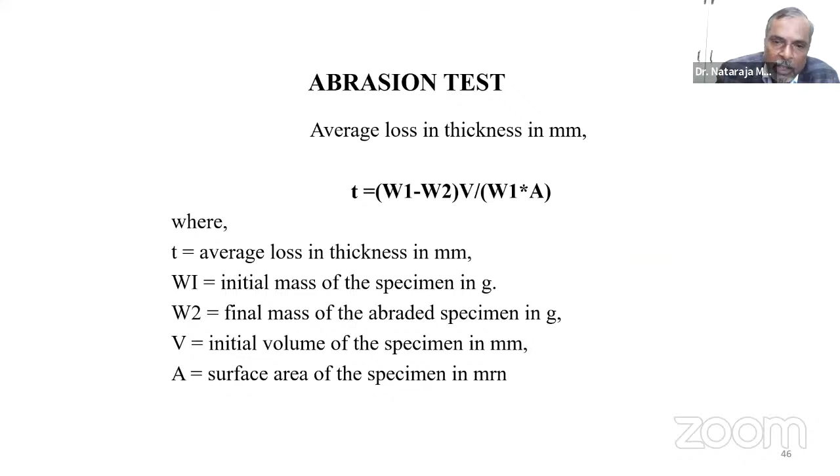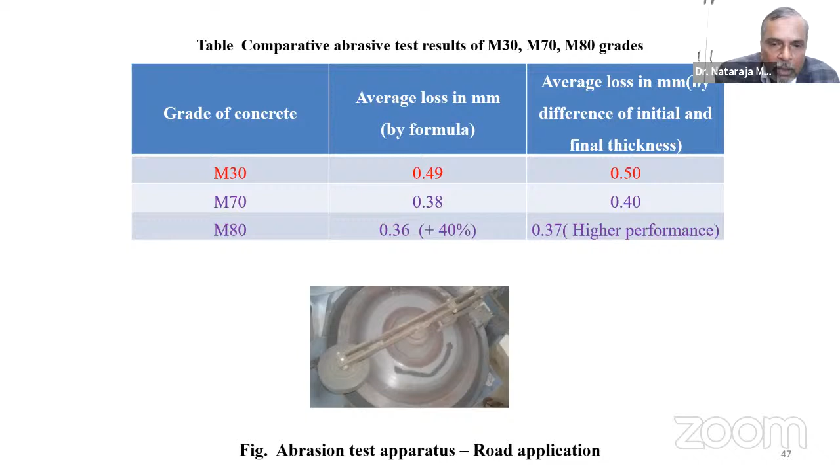Also, we have done the abrasion test, and I will share the result. For M30 concrete, the wear and tear on the surface for a given duration of testing is about 0.5 mm. But for M70 or M80 concrete, the wear and tear is also quite less, to the extent of about 40% the wear and tear resistance of the concrete can be enhanced. The average wear, in fact, decreases.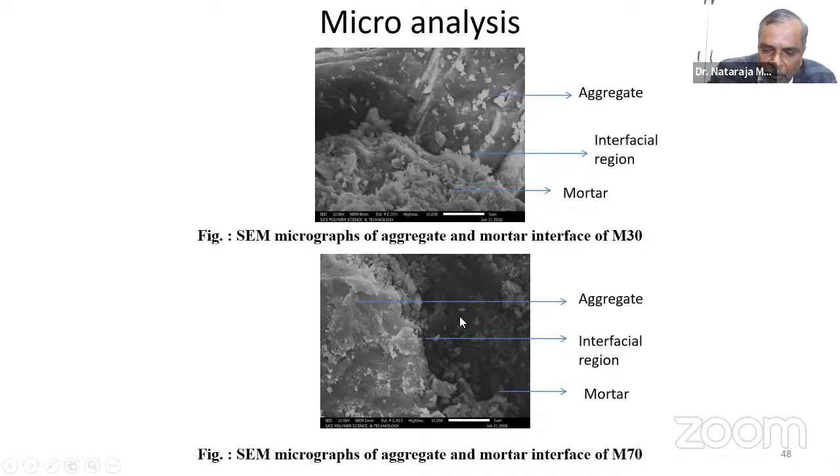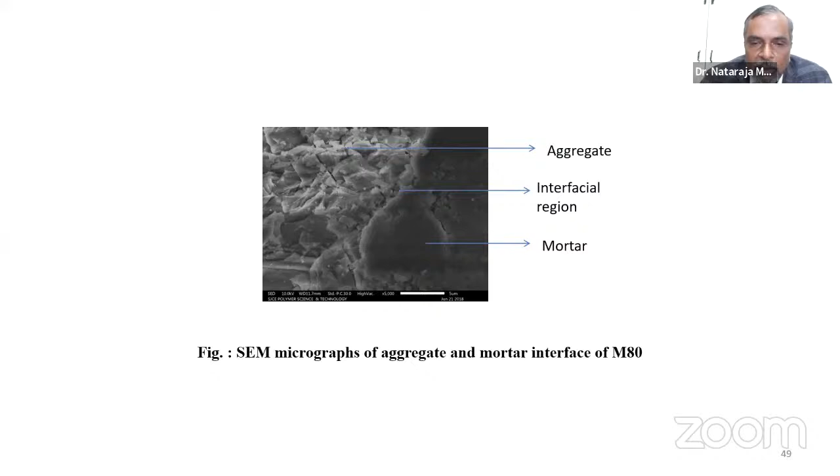And of course, we have also done the microanalysis. I'm not sure whether many of you are familiar with this. What I can tell you is, if you have M30 concrete, this is the aggregate and this is the cement phase, and you can see some light distribution of this structure. There exists a small gap at the micro level, at the nano level. But when you see M70 concrete, that gap is densified. Similarly, in M80 concrete, that densification becomes denser and denser at the micro and nano level. This indicates that the transition zone, which I was referring to in high strength concrete, is really becoming better, and thereby the bond characteristics of the concrete, especially between the aggregate and the cementitious system, are many times better. That is where the improvement in strength properties and performance characteristics of the concrete comes into the picture.

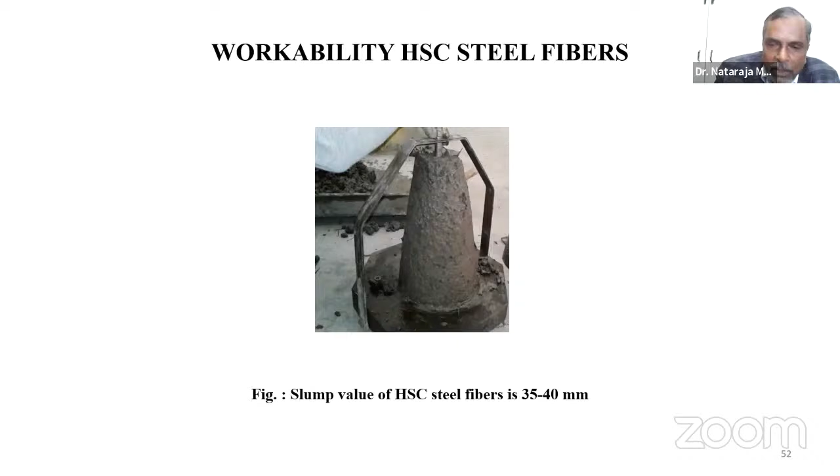Just to tell you, it's the same mix design. In fact, we have just added the fiber at different proportions, and this is where the workability decreases. If you add the fiber, I'm still getting about 40 against 75. But if we add an additional 0.25 dosage of chemical, the workability will increase to something like 75 mm or so.

As the steel fiber increases, the strength of the concrete also increases, the flexural strength. Today, pavement concrete is to be designed for characteristic flexural strength, not characteristic compressive strength. We have done that in our work too. Depending on the range of flexural strength, we can do the mix design. So with 0.5% and 1% of fiber, the flexural strength is increasing.

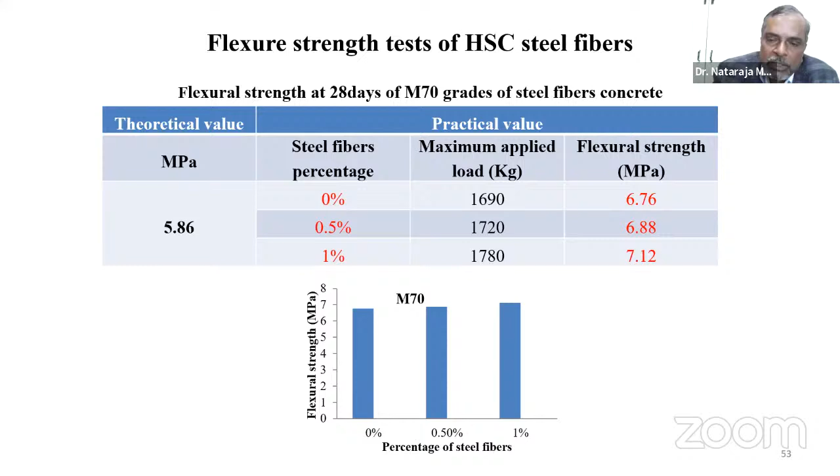But mind you, if your idea is only to increase the flexural strength, don't add fibers. We need to decrease the water cement ratio to get increased flexural strength. In addition to the flexural strength increase, we are getting many other improvements, especially in energy absorption capacity. If that is the only requirement, I suggest you put in steel fiber. Otherwise, don't put steel fiber just to get some increase in compressive or flexural strength.

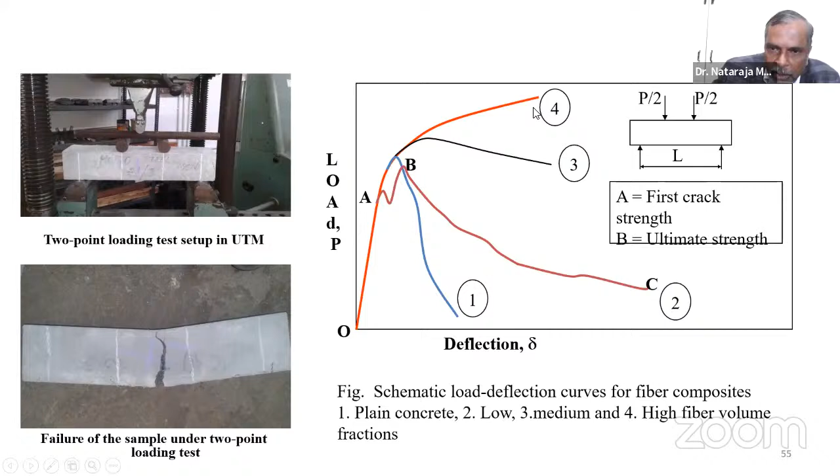This is the relation you all need to appreciate, and this is the setup we have used in our laboratory. This is the behavior for normal concrete, my dear friends. The moment you add steel fiber, the drooping behavior becomes like this, with a tremendous area under the drooping portion. That is where the enhanced ductility and energy absorption capacity come from.

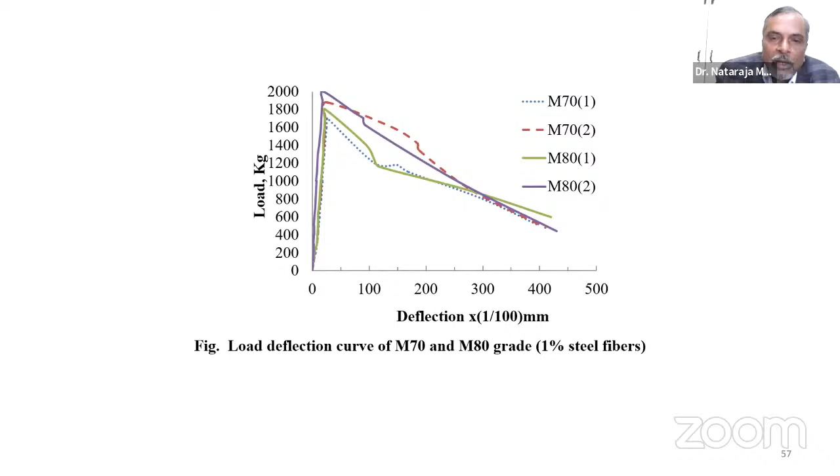These are all the typical graphs for M70 and M80. For M80, the area under the curve is definitely increased, and that is where the toughness of the concrete comes in, again for 1% fiber. This is for 0.5% fiber. If you are happy with that toughness, limit it to 1%. If you want an enhanced percentage of fiber, your area under the curve further increases. All this area calculation can be done because we have the tools available at present, and the ductility of the concrete can be determined.

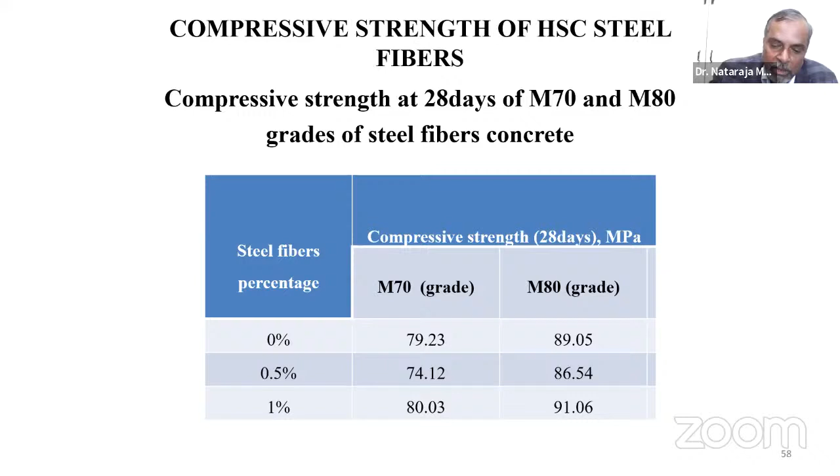Kindly see the increase in compressive strength. In fact, the compressive strength is decreasing marginally for 0.5%, and for 1%, there's a small percentage increase. What it means is the addition of steel fiber need not increase the compressive strength - it can increase marginally, sometimes decrease, but that is not the idea. The idea is only to increase the area under the curve, unless these things are looked at from the point of mix design. So there's no point in simply adding the fibers.

So coming to the end of my presentation, I have only 4 general conclusions. Characterization of aggregates and cementitious material from the point of design and from the point of performance is a must. Otherwise, we will never be able to get high-strength concrete.

Today we have a code IS 10262, and it's a boon to all the stakeholders, especially civil engineers and researchers, where different types of special concretes - ordinary concrete, standard concrete, high-strength concrete, self-compacting concrete - are also covered. Mass concrete is also covered in this particular code. Of course, we need to use combinations of mineral and chemical admixtures.

Use of mineral and chemical admixtures today is a must from the point of durability, because IS 456:2000 is a durability code and not a strength code. And what you will see in the days to come is a performance-based code. Obviously, today we need to take performance into consideration in the design of any concrete, including pavement concrete.

Use of crushed aggregate and M-sand, as the earlier speaker also mentioned from the point of sustainability, need to be encouraged. The concrete I have considered for this study is quite durable, eco-friendly, sustainable, and hence most suitable for rigid pavement application.